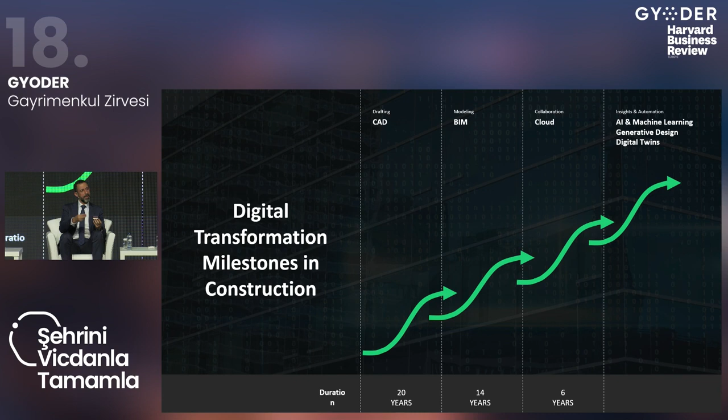Later on, in the mid-2010s, I would say, there was a next big jump with connected BIM. So what we now call digital project delivery. So it was BIM amplified by the power of the cloud to ensure better collaboration across distant teams in the design process. And finally here, what we're seeing now is what I call the age of insight. So we generate a lot of information, but how can we do better decision-making from that information that we generate, right? And throughout the process, we've gained incrementally more benefit.

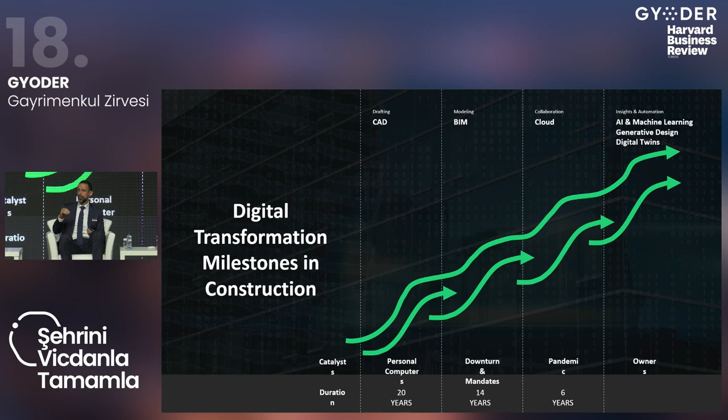And each phase had its own catalyst. So the move to CAD was facilitated by personal computers. Move to BIM was the 2008 downturn and then the BIM mandates. Funny enough, the pandemic accelerated the use of cloud, and now owners are demanding better insight based on data that they have from the design process.

So they warned me against doing that, by the way.

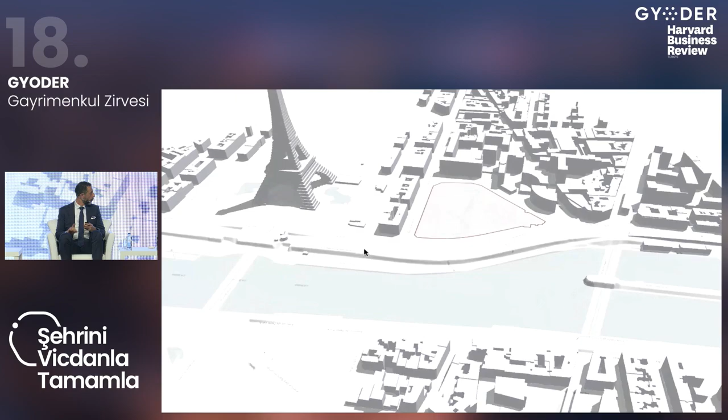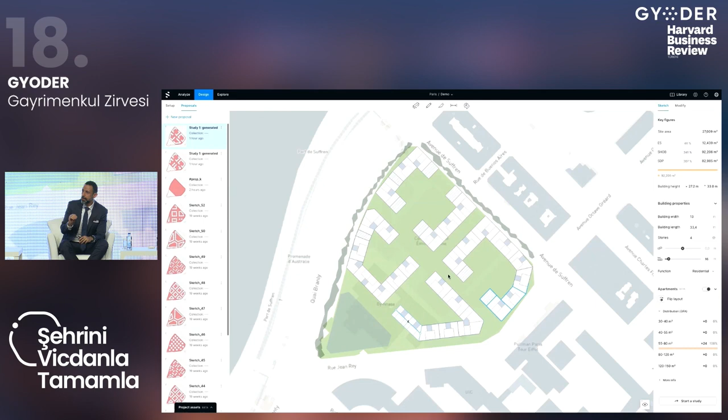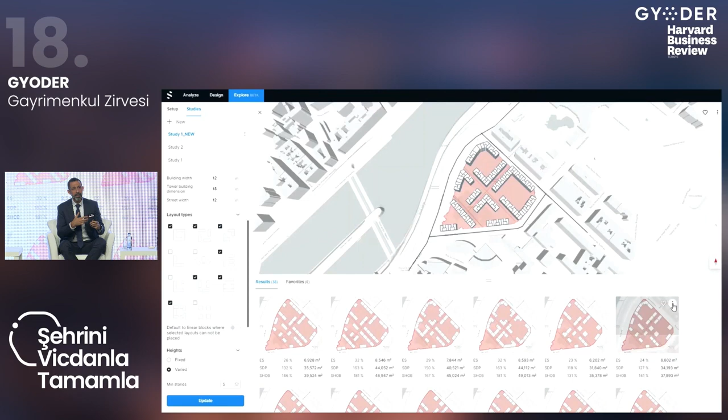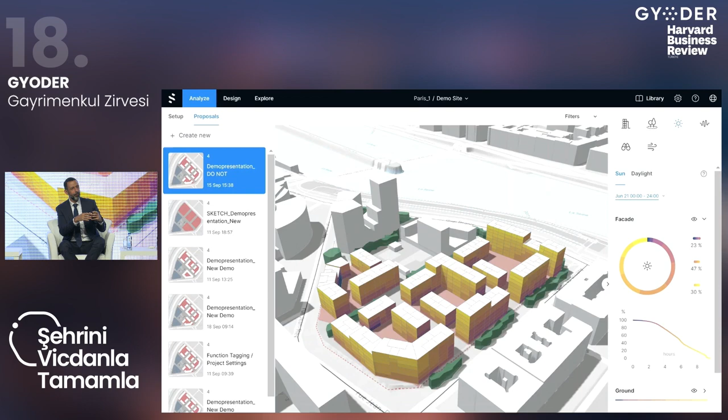One button. So what you see behind me is insight, right? What you see behind me is an algorithm looking at a plot of land and evaluating that plot of land for things like the number of units, the rentable areas, the green areas within that community, and it all happens in context. So in this example, this is a real plot of land next to the Eiffel Tower that is being evaluated. And instead of one person doing one analysis on one option, what you see is an algorithm giving you tens of thousands of options in virtually no time, right?

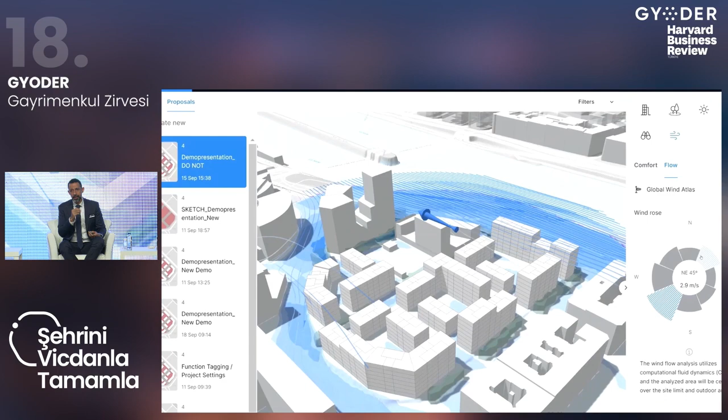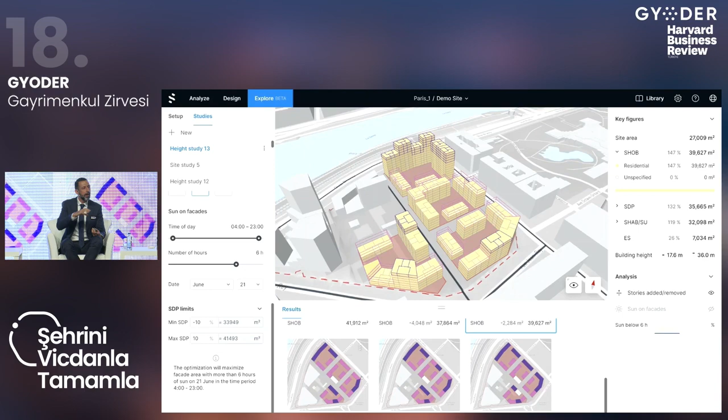Those algorithms are now loaded with things like artificial intelligence, predictive analytics that can intuit results. So instead of doing a computational fluid dynamics simulation of how the wind flows, that algorithm can actually give you a very good first guess and take you directly into that decision-making mode. So this is the age of insight. This is not common practice across the industry now, but this is what you can expect to see happening in the next few years. We see some adoption, but it's certainly not the norm. This is the norm. It's digital project delivery.

In this case, I'm talking about the Red Sea Global. So if you read a bit about the construction industry, the single largest construction opportunity now is happening in Saudi through the Public Investment Fund projects. Red Sea is one of the projects that are being managed there. This is a $16 billion project over an area the size of Belgium, right? Massive, massive development. What's interesting about this real estate owner is that they said, I want to own the data from the beginning, not just the assets. So everyone in their ecosystem actually goes to their environment through the cloud. They do the modeling in their own environment, and they get out at the end of the day, which means that someone like Red Sea retains that knowledge, retains that information.

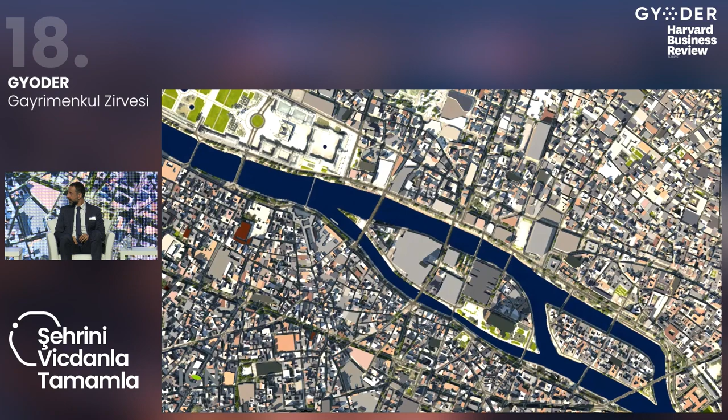The coolest thing for me here is after the life cycle of maybe 20 years, these modules can actually be dismantled and reassembled somewhere else. So talking about circularity in construction. And I want to close by just a quick video going back to Paris. We work a lot with the city of Paris.

This is a simulation that is being run citywide. So now insight is not just on a certain building or a certain community. It is citywide. What you can see is a traffic simulation with real-time data coming from sensors into this model that can actually look at where bottlenecks in the system are and advise the designers to take corrective action. That corrective action can be diverting a certain traffic route, or it could be on the next construction project doing something differently to cater for that environment.

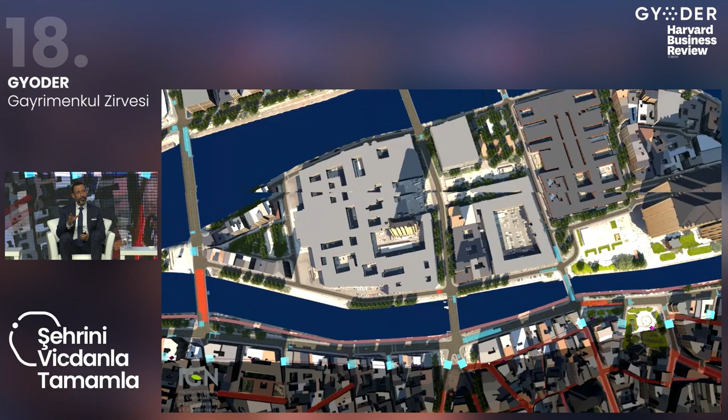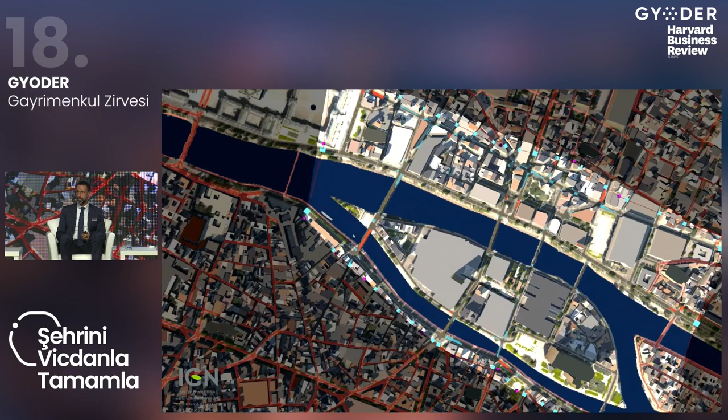So I just wanted to give you a brief overview of where things are in digital transformation now in the industry. And there's a lot of talent here. I've seen it with flagship projects like Istanbul Grand Airport, like Metro Istanbul, which are quite advanced at a worldwide level, seeing how industries operate across countries. You do have a lot of excellence in Turkey. And it has been always a pleasure dealing with those projects. And again, we do have a large contingent of very talented people in Turkey. Any way we can help you digitally transform, please do let us know.

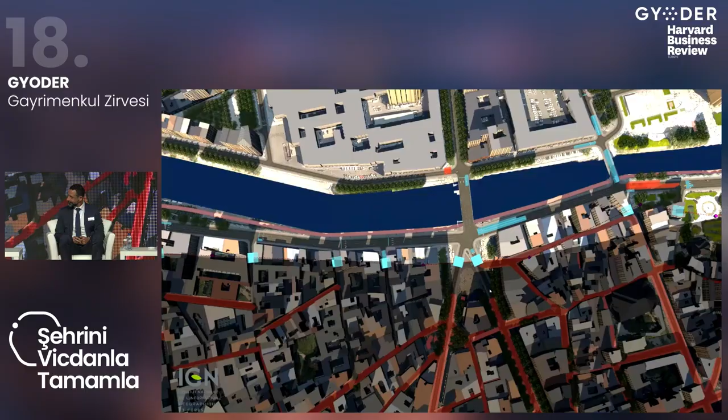Excellent. Naji, thank you very much. Thank you. I think it's quite interesting to see that sometimes we're maybe too pessimistic and say, oh, we could be much further down the line in digital transformation. But what you're showing us is basically that a lot is available already, and maybe it lacks a little bit of awareness and hence adoption. And you know, there's a lot of work done as we speak on many fronts in the industry, for sure.

And so I want to come to Bernhard. You represent Progress Group, or Green Code to be precise, which is part of Progress Group. You're in modular construction. You've got a lot of experience in BIM, but you'll probably talk more about that when you talk about the angle of actually realizing what is being designed. Yeah, thank you very much for that. I'm going to talk a little bit about the creation then of the buildings.

So digital models are always the basis of any manufacturing, automated manufacturing. And therefore I want to go a little bit deeper into the building system and how the data that the architects actually create is being used on a day-to-day basis. And the examples that I'm going to show come mainly from all over Europe. So here we see an automatically produced facility which was produced by only 5 persons. But let me go a little bit step back and talk about what the challenges are that we are currently facing as the construction industry.

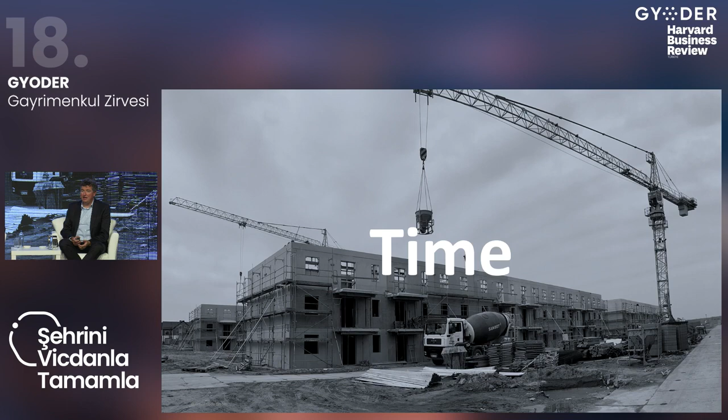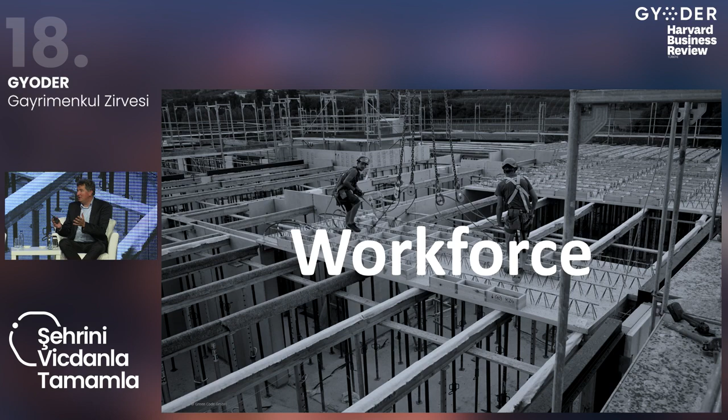And last but not least, here in Turkey you currently still have a lot of workforce, but in the rest of the world, especially in Europe, we do have a huge issue with the available workforce. And the ecology, the sustainability, is something that we've already heard today: we need to have a building system which sustains us into the future. Therefore, I try to answer these questions a little bit in the next couple of slides and how this is possible.

This is an example of an industrially produced and individually planned housing estate in Italy, which was constructed over a time period of 2 years. In total, they erected 14 towers here, where the structural part, the insulation, the climate, the airflow, the lighting, and the acoustics were all integrated and pre-produced in the factory, delivered to the construction site, and then erected there. The basis of this solution is a semi-prefabricated solution, so you will still have some infill concrete on site to finish the products.

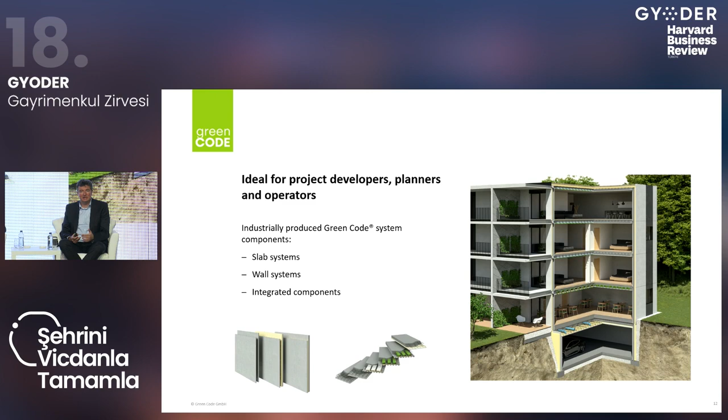But as I've already told you, it's produced in automated production facilities. Here is a short example of an automated production facility. This facility is in France, where very few workers are actually creating thousands of square meters of finished product every day.

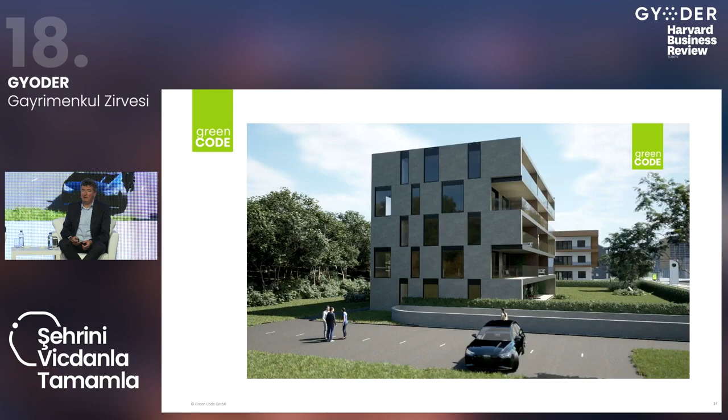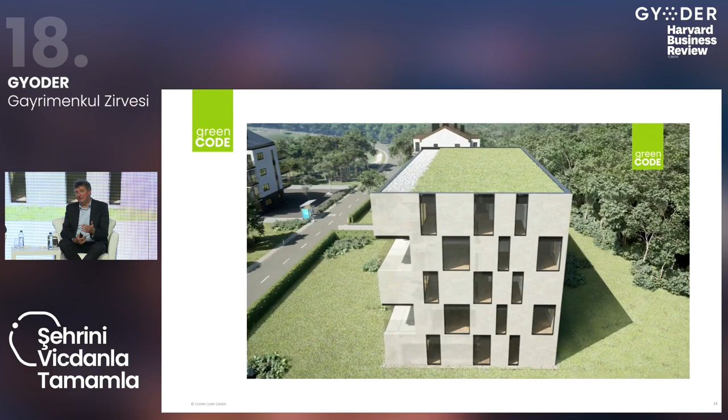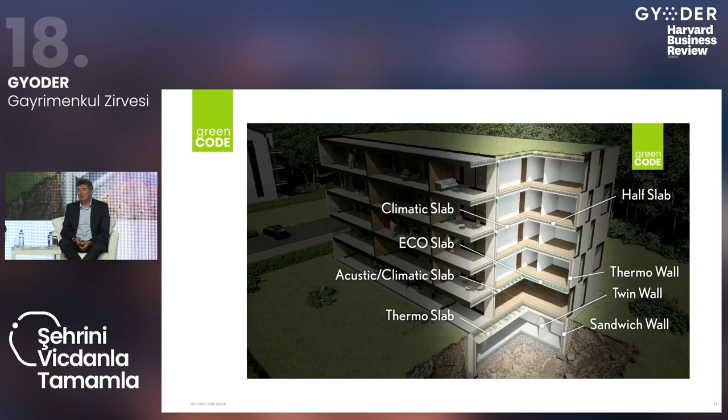So here is a short video which explains the building system a little bit better, where you see the different types of walls. We are hugely advocating green roofs to improve the overall thermal efficiency of our buildings, then highly insulated walls on the outside to reduce the amount of heating and cooling required, and then different kinds of slabbing solutions depending on the use of the building.

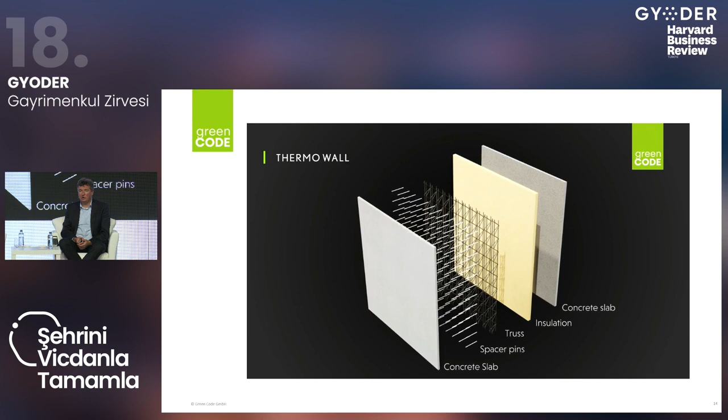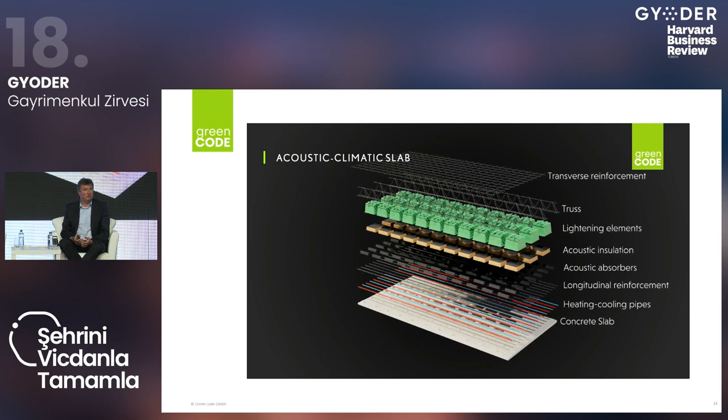Here you see an example of an insulated walling panel, which is automatically produced in a factory. In an explosion view, you see the insulation part and the two concrete slabs, which are working together. And then with the infill concrete, you're creating a monolithic building system. And here is the same thing for a slabbing solution, where you have the acoustic optimization and heating and cooling directly integrated into the slab. So this was just a very short technical outlook on what we're doing.

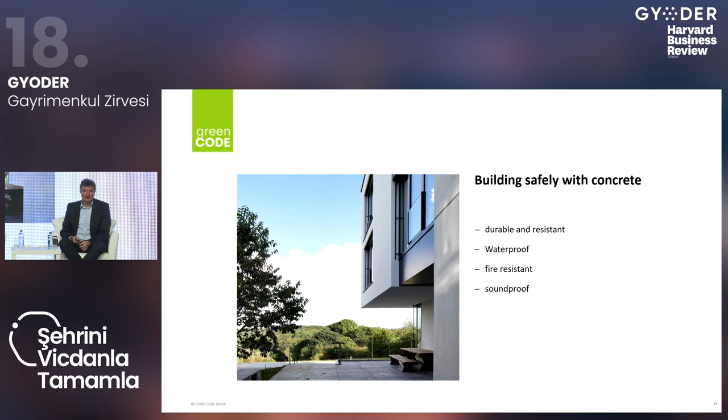I want to show a few more examples, because here you can get a look and feel of what is possible with the solution. Here we see a hotel building in Bad Gastein. They just opened this building, so I still have some pictures from the construction site. But it's important that this was also on a fault line. It's not the same fault line as in Turkey, but it is in a seismically active area, and they used the system. And why did they use the system? It's because of the rigidity.

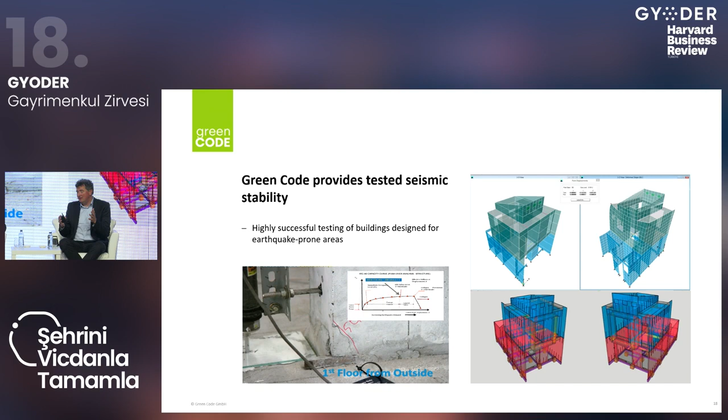Here we did a test with the University of Milano, to make sure that this system has structural soundness and can be used for seismic stability. Through being a monolithic building system, it is very, very rigid in total. And what you can see here is the deformation of the building, the actual building we've seen before. It can be quite active, and through the monolithic core, it can deform and stay quite in shape.

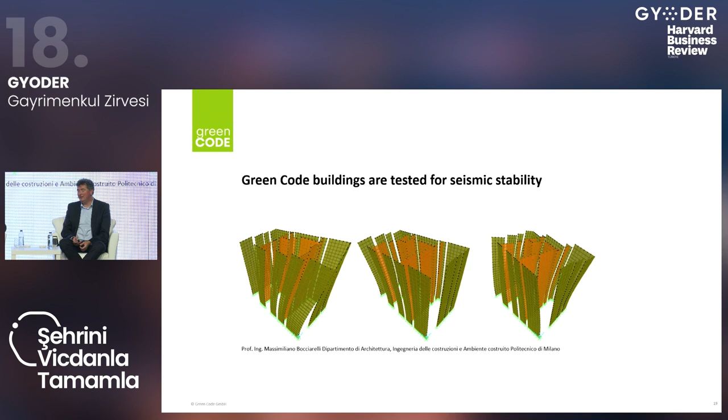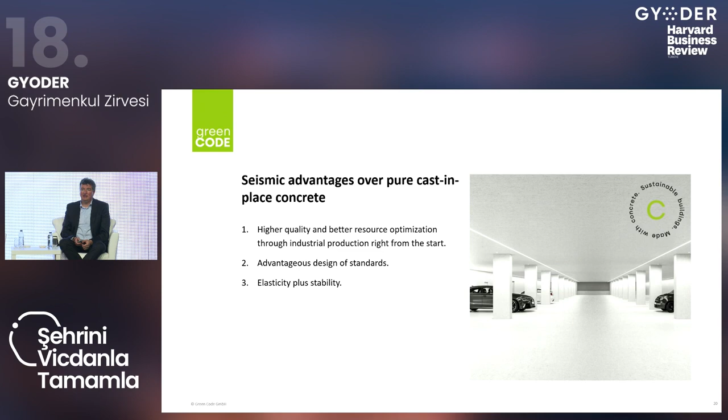This is to demonstrate that even in seismically active zones, this system can be used quite easily. Therefore, it has been adopted also in China. A lot of the active zones in China are actually using this type of building system more and more. And you have the standardized quality, you have the advantages of design standards, of being able to create anything that you can envision in an automated and industrial way.

And it has to be cost effective. If it's not cost effective, then it's never going to be adopted by any region in the world. And how can we say that it's cost effective? It is that you can reduce the time span on site.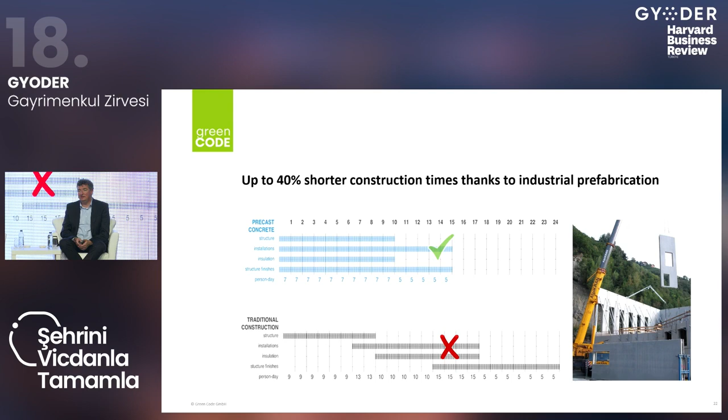This is a short graph which demonstrates the difference between traditional concrete, below, and precast concrete or the Green Code system on top. And how can you save time on site? It's by integrating different building services which in regular construction are done in sequence on site. Here they are put into the factory, and therefore you can shorten the construction time on site by 40%.

Here we see a short example of Poland. Poland has become one of the major markets for the prefabricated system. It's just because they also have a history of building prefabricated, and they now have a boom in the housing sector since their economy is booming, and they are just building and building new projects on and on.

But by adopting this system, you can also save money on operation costs. This is something that the real estate developer is probably not going to have as his major advantage, because here the major advantage is in the usage of the building. By having the ceilings activated, having the heating and cooling directly in the ceilings, you will be able to reduce your energy input into the system by somewhere between 15 and 20%, and so through the low maintenance and overall costs, in the operating part, you're quite

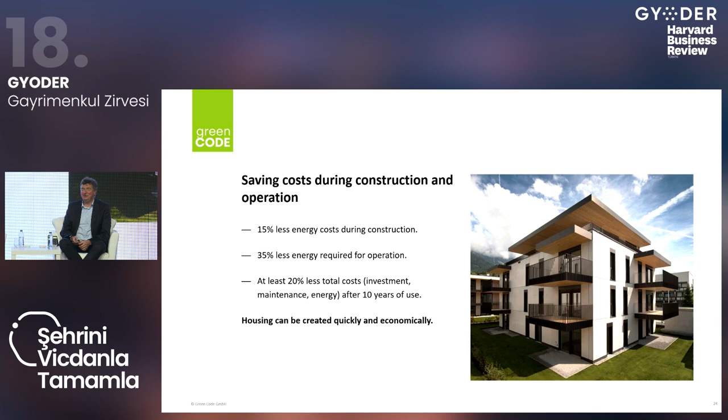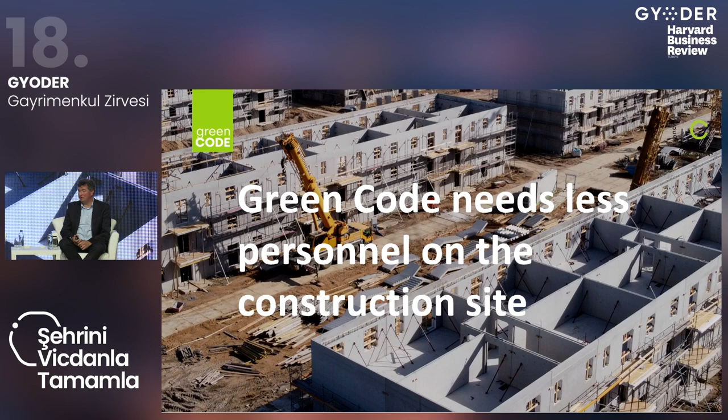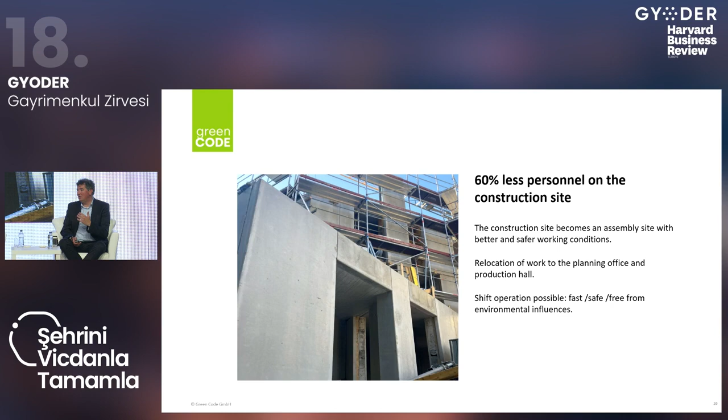effective. And furthermore, during the erection sequence, it needs a lot fewer people on site. It's something that I said at the beginning. In Europe, we are facing a major shortage of qualified labor, and therefore we can reduce the personnel on site by more than 60% by adopting this system and going in this direction. It gets a lot quicker on site, and I need less skilled labor on site. This is the important part.

And I think sustainability and workability is something that we really all try to achieve, having a better opportunity for all of us. And by putting the production into a safe environment, into a factory, you can have a lot more quality, and also quality for the workers. It's not that they have to work on site.

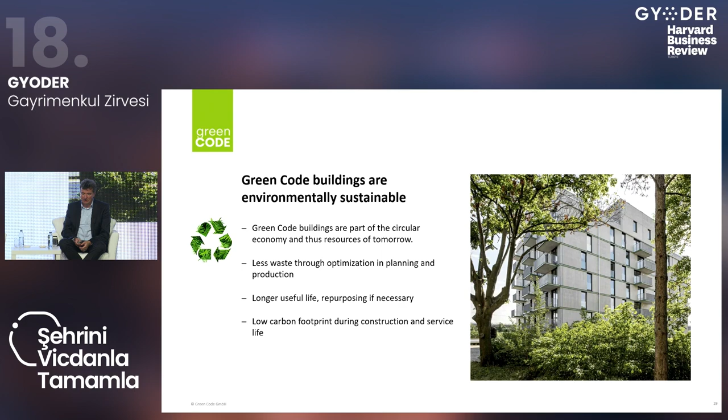And therefore, we are hugely promoting the sustainability of all of our buildings, because you have less waste on site, you have a longer use of the building, and over the 80 years that concrete buildings are usually designed for in Europe, you have a lower carbon footprint than other buildings. And they are socially sustainable, meaning that you can build affordable housing space with it. And I think affordability is something we all strive for.

And through having the ceiling activated, you actually have an excellent indoor climate. It's something that you really have to live in to feel. Here is a short example of how this works. The ceiling is activated, so you have tubes going through the ceiling, and in the summertime you run cold water, in wintertime you run warm water through it, and you only need 17 or 18 degree cold water, so you don't need a lot of energy to cool the building, but you're actually drastically cooling the building.

It's not the same thing as an AC. It will never be the same as when you get into your car, start the AC and have the cold wind blowing at you. This is more a tempering of the building. It is similar to when you go on a hot day into a cold cave where everything around you is cold, and you just feel very comfortable in it.

At the end of the day, this building system has been realized in thousands of projects all over Europe, from Spain to Poland. This is where the technology currently reaches, and now we're looking into different markets and things that can be achieved also outside of Europe. Here, just for the end, a couple of examples. This is a very nice real estate development in Lago di Garda. Tura was just there a couple of weeks ago, and I think you can attest that this has been a very nice project. Yes, indeed.

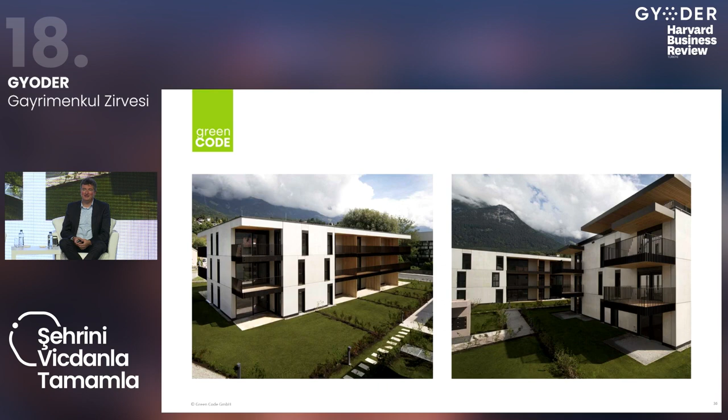And then you see different solutions here in the northern part of Austria, with residential buildings creating livable, affordable living spaces at affordable prices, then a little bit higher class living space for medium income families, and then high-end living space here in Italy, in Bolzano. Then we have the specialized solutions, such as the acoustic climatic ceiling, where we can activate ceilings and have the acoustic optimizations inside. And I finish my part with a couple of pictures from Germany, where we have assisted housing and affordable housing. And that's what I wanted to show you today.

Thank you, Bernhard. Listening to the both of you, what strikes me is that it just looks like a great combination. And having in mind that this country, the earthquake zone, needs maybe 700,000 housing units as soon as possible. But the rest of the country needs anywhere between 4 and 5 million housing units.

Affordable housing is a big topic, obviously, as in most other countries around the world. But this shows me it doesn't have to be boring; it can be cost efficient, and it can be very quick. And you need a lot less workforce actually in the design office, in the production facility or on site, which doesn't mean it will take away jobs. It will just mean that you can do more at the same time, especially when you're in a situation where you need to basically build a huge amount in a very short period of time.